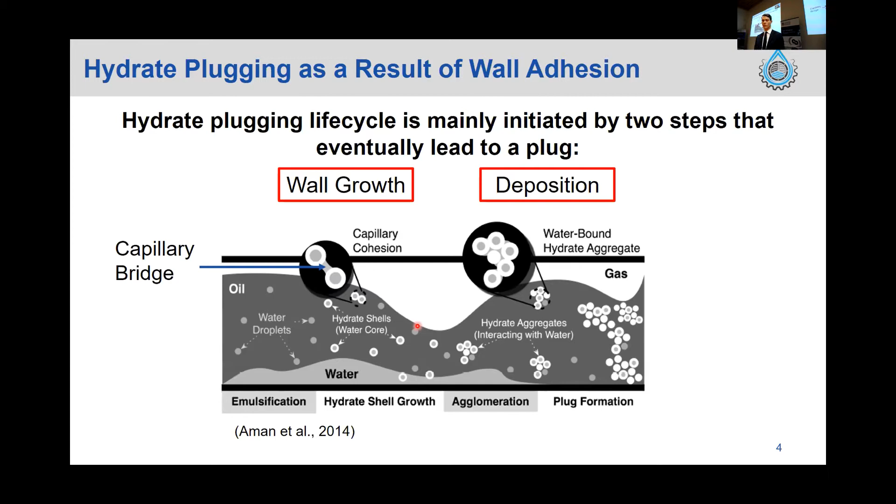The two particular components that this research focused on were wall growth particles—hydrate particles that have actually nucleated on the wall, which I mentioned before—and also hydrate particle deposition, which is more so talking about the traditional case looked at for hydrate particles that nucleate in the fluid and then make their way to the wall and form that deposit based on capillary bridge adhesion.

The actual material I've looked at, which Bruce mentioned briefly, is a thermoplastic composite developed by Airborne Oil and Gas. The one I'm looking at particularly is PVDF material, which is basically produced by melt fusing layers of this plastic together to form that structural integrity.

Some of the properties that have been tested are a temperature tolerance of 121 degrees Celsius and a pressure tolerance of up to 15,000 PSI. One of the really inherent benefits of this material is that it's inherently corrosion resistant and highly resistant to harmful chemicals.

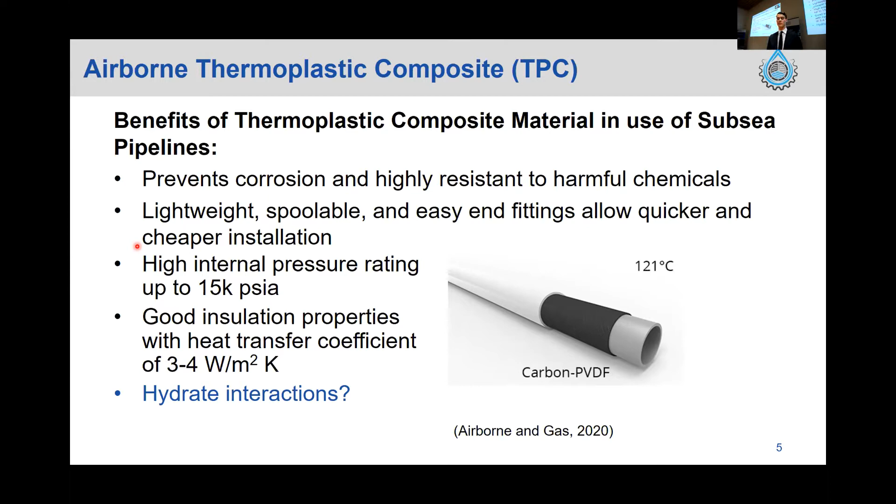That was the initial attraction for this plastic material. It's lightweight, spoolable up to long lengths, and has end fittings, which allow for a reduction in capital expenditure when installing. It's a great insulator, and all of these properties have been tested by Airborne Oil and Gas and are well known. So the focus of this research was to look at the hydrate interactions of the material and a potential further benefit for it.

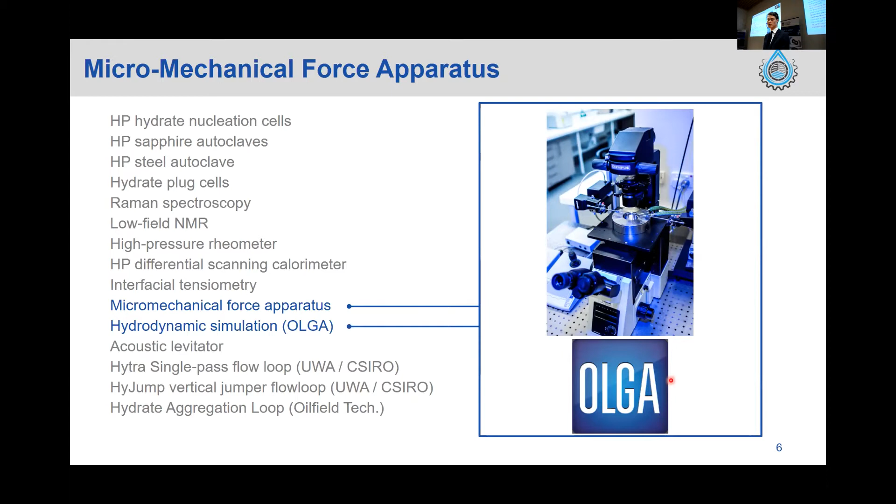On either side we have a cantilever held by a micro manipulator. The cantilever on the left holds the hydrate particle that's formed, and the cantilever on the right holds the substrate, in this case the thermoplastic composite substrate. A bit of the research at the end used the OLGA simulation to validate a potential technique.

Just to talk quickly about the MMF procedure - firstly a hydrate particle was formed with four steps. The water droplet was sprayed onto the end of one cantilever, about 300 to 400 micron diameter. That particle was transferred to liquid nitrogen, where it was allowed to freeze. Once frozen, it was quickly transferred to the cyclopentane bath, pre-cooled below the ice point. Once in the bath, the cyclopentane was raised to above 0 degrees, into that hydrate formation region of up to 7.7 degrees for cyclopentane.

This is a quick video of one of the pull-off trials. This is a little different from mine since these are two hydrate particles, but it gives the basic idea. There would have been a predetermined contact time, and now this is the actual pull-off itself - the top particle, or in my case the substrate, is pulled off until the particle dislodges from it.

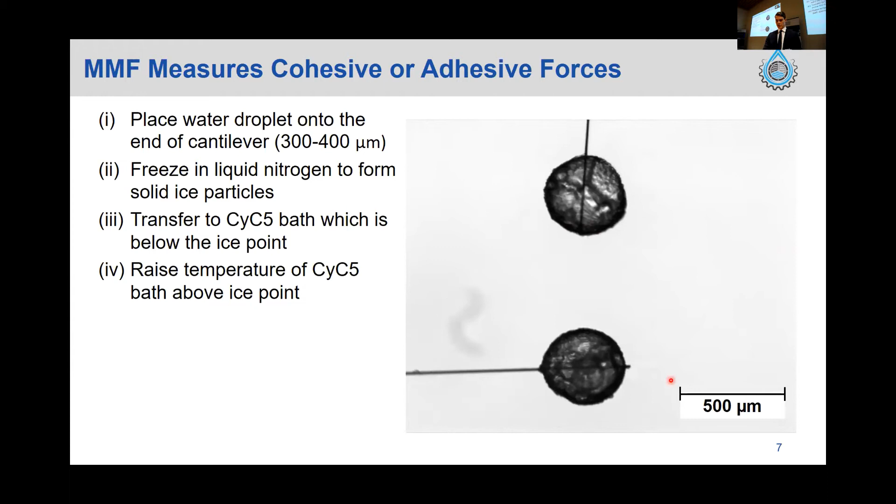Once that happens, the displacement of the hydrate particle from the substrate, in my case, is measured, and that, along with a known spring constant of the carbon fiber, is able to calculate the adhesion force using Hooke's law.

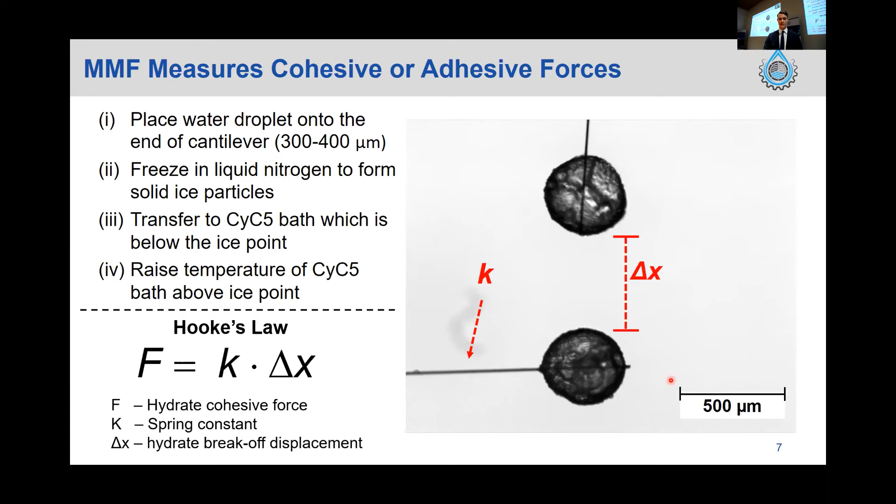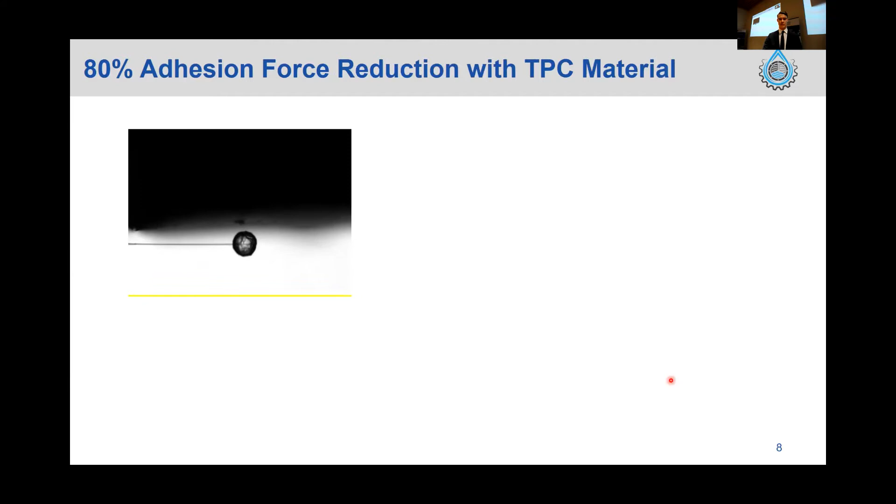Here is a video of a pull-off for my baseline TPC measurements, just to give you an idea of what that might look like. So, not a lot of adhesion there.

This is basically where the research started, with finding the baseline for the TPC material, so we could compare it to other materials that have been previously well tested, namely carbon steel.

Just to walk you through this figure - on the vertical axis we have the adhesion force, in millinewtons per meter, with each of the trials labeled. For each trial a new hydrate particle was nucleated, and each data point shows the blue mean, with a 95% confidence interval also shown.

Along with that is the mean baseline for carbon steel. What you can take from this figure, which is quite visually obvious, is that the TPC adhesion for each of these trials was well below that for the carbon steel. In fact, the mean TPC adhesion was an 80% reduction, as mentioned previously.

For comparison, Lehane's TPC baseline on a non-water saturated system is plotted here, which agrees closely with my results. That reduction in adhesion force for the TPC compared to carbon steel was explained by a relatively hydrophobic surface.

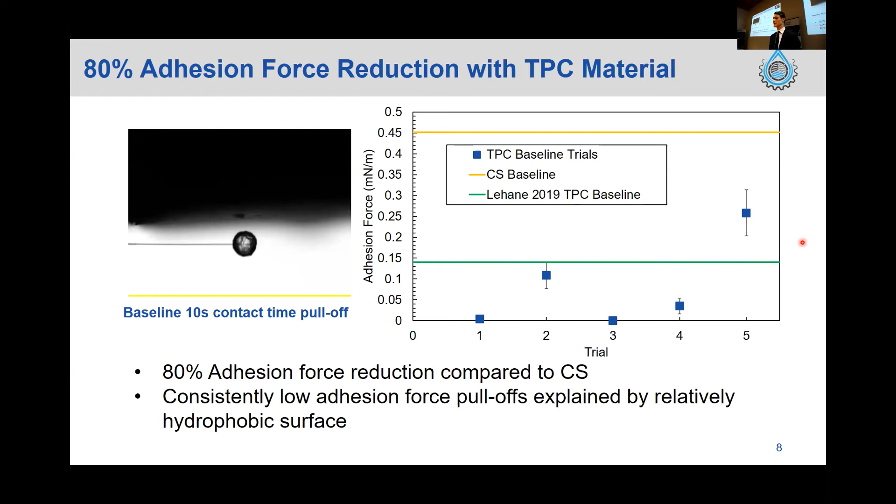After this baseline, the next direction of the research was to investigate how this adhesion might vary if the contact time was increased. For these baseline measurements, there was only a 10-second contact time, comparable to other studies done on other materials.

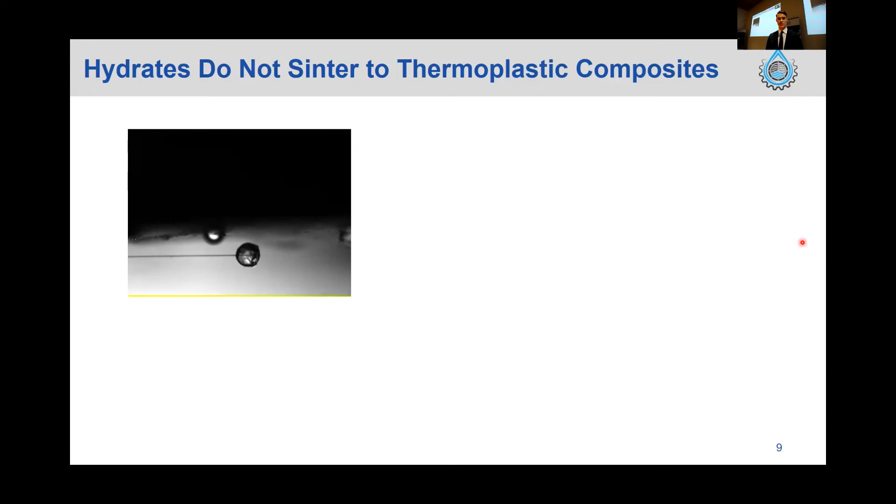And as you can see, not a lot of difference there at all between that and the previous slide, not a lot of adhesion force.

This figure shows the adhesion force on the vertical axis and the contact time on the horizontal axis. The three contact times measured and investigated in this research were 10, 30, and 60 minutes.

There is no general trend to this data, which previously for other materials, namely carbon steel, was definitely found within that time. What to take from this is that a sintering mechanism doesn't begin to dominate over these longer contact times, where with carbon steel there was a chemical interaction that would begin to dominate that adhesion and really increase the adhesion force between the particle and the substrate. That was observed up to 1 hour.

So again, both the baseline and the time-dependent pull-offs were shown to have a relatively low adhesion force. The next progression was to look at what might potentially happen if the hydrate particles nucleated on the wall as opposed to in the bulk fluid.

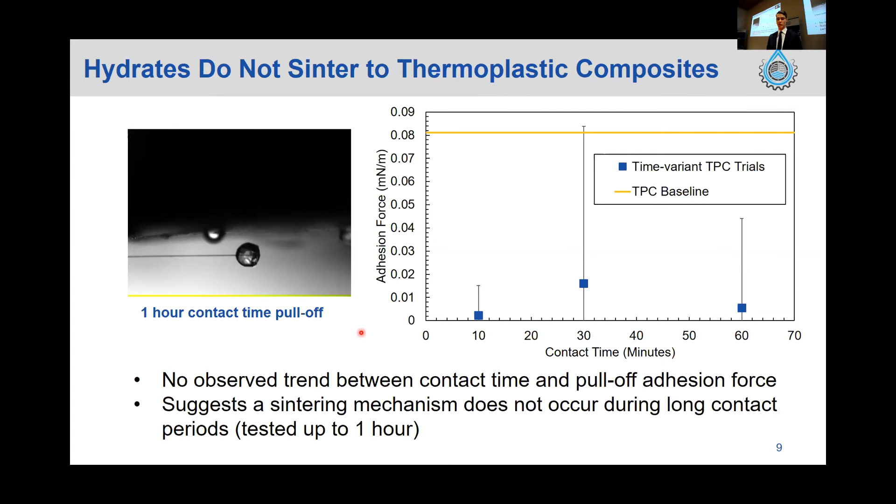Here is a figure showing, from left to right, the 10-minute intervals of a 60-minute annealing period for one of these hydrate particles nucleating on the wall. The procedure was that when the hydrate particle began to nucleate, it was brought into contact with the wall so that nucleation mechanism could interact with the wall.

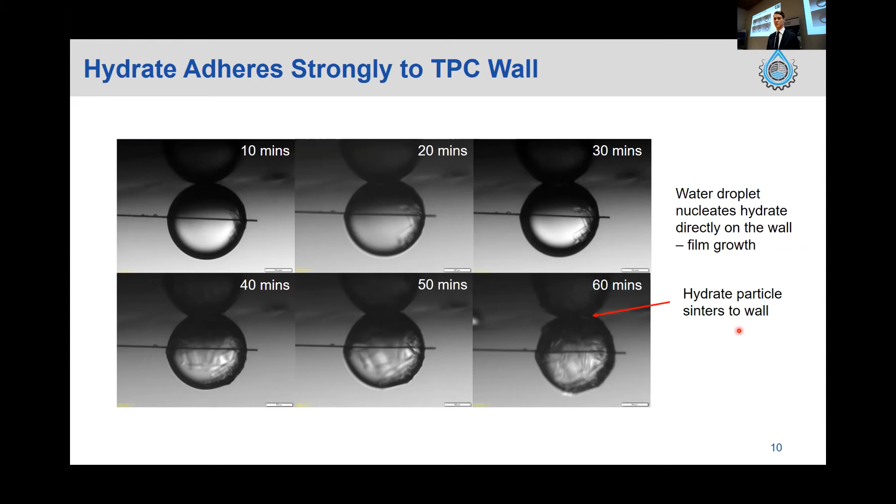Between each picture you can see the interface expanding, and you can actually see this film growth begin to happen. You'll see in the next slide that that film growth really causes the adhesion to increase largely compared to those hydrate particles that were just formed in the bulk fluid. I'll show you that now.

You can see visually how that was a much larger displacement than the previous two, and you could see a bit of the hydrate film coming off, which was contributing to that adhesion force, requiring a much larger pull-off.

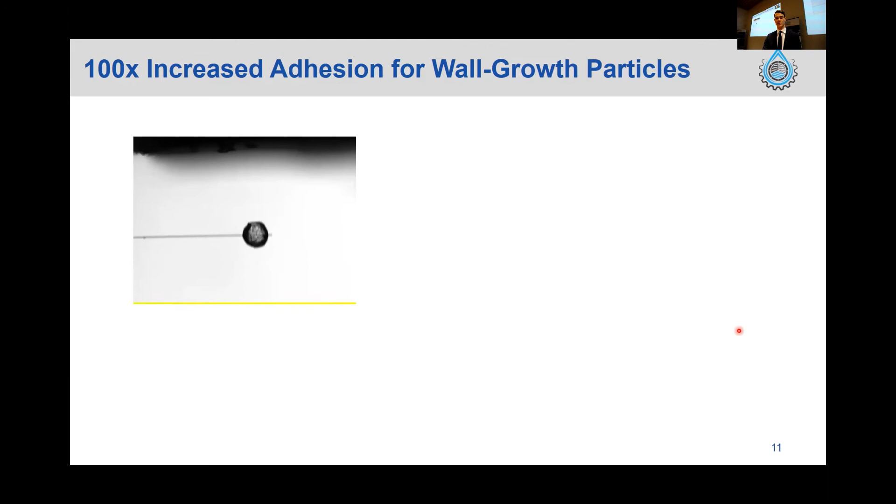Here are plotted the three individual trials that were done. For these, there weren't repeat pull-offs performed because, as you could imagine, once that hydrate particle had been pulled off, that structure was changed and couldn't be reattached by putting it back into contact. For each of these, you can see it's generally within the region of 6.5 to 8 millinewtons per meter, which is actually a 100-fold increase from the baseline and roughly the time-variant trials.

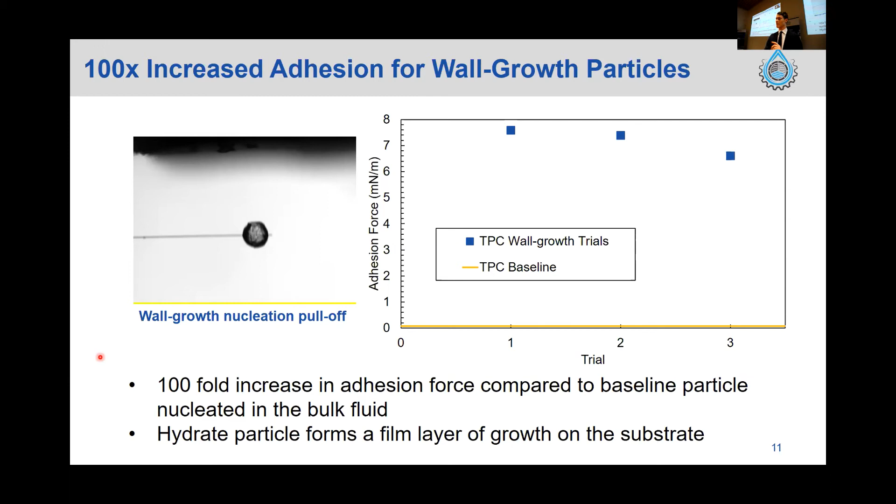That obviously poses a much larger risk in the context of plugging, and that, as I mentioned, was basically a result of that film layer really increasing the adhesion through a chemical interaction. So the next step was to introduce anti-agglomerants and potentially look at how they might affect that adhesion force.

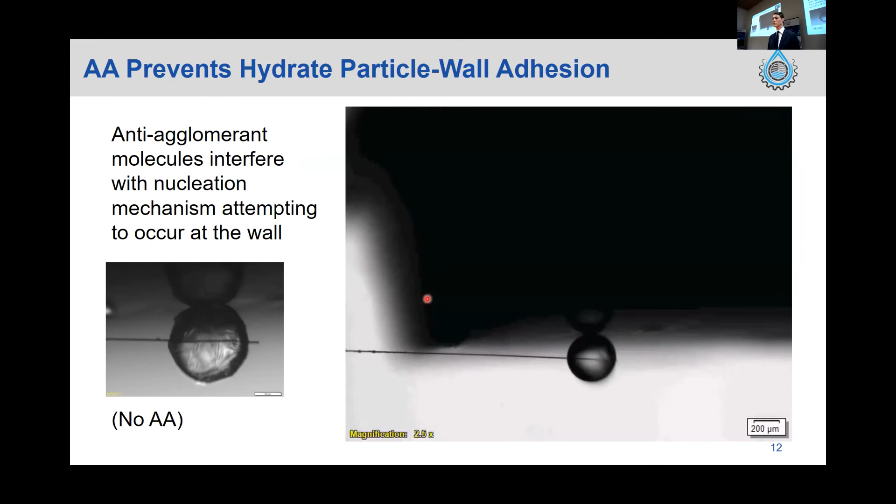For comparison, here is the last picture of that 1-hour annealing period, so you can see the film that had formed. And here is a video of a 1-hour time lapse for a hydrate particle forming with 0.05 weight% anti-agglomerant in the system. I'll show you how that played out now.

As you can see, very different - that interface is extremely small. The anti-agglomerants really interfered with that hydrate nucleation mechanism to the wall, and you can actually see it was forced to grow outward like that.

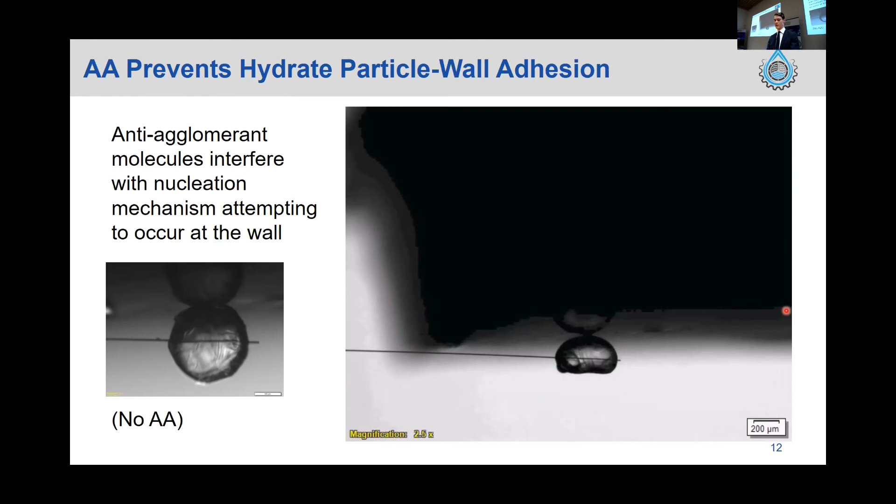It's quite interesting, you'll see the pull-off of that same particle in the next slide. I'll show you that, and you can just see how much effect the anti-agglomerant really had on that.

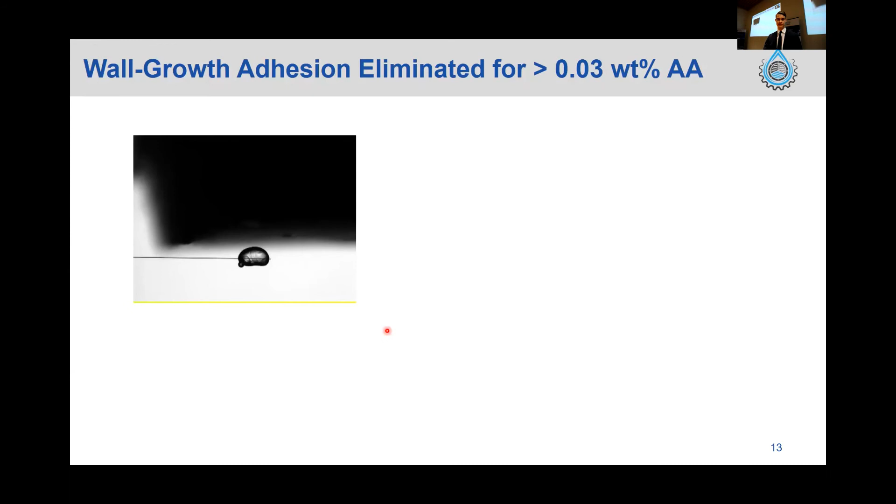So what you could see there wasn't even an adhesion force at all. It was a complete reduction to what could be measured on this apparatus. So that was really promising.

So basically with those anti-agglomerants, there was a variety of weight percentages tested. The findings were trying to find a maximum weight percent where an adhesion force could actually be measured. That was all the way down at 0.03 weight percent anti-agglomerant in the system, which produced an adhesion force of 0.13 millinewtons per meter, quite comparable to what was seen for the baseline and the time variant, relatively low compared to the wall growth with no AA present. The summary is that quite confidently there's a complete reduction in that adhesion force below 0.1 weight percent anti-agglomerant.

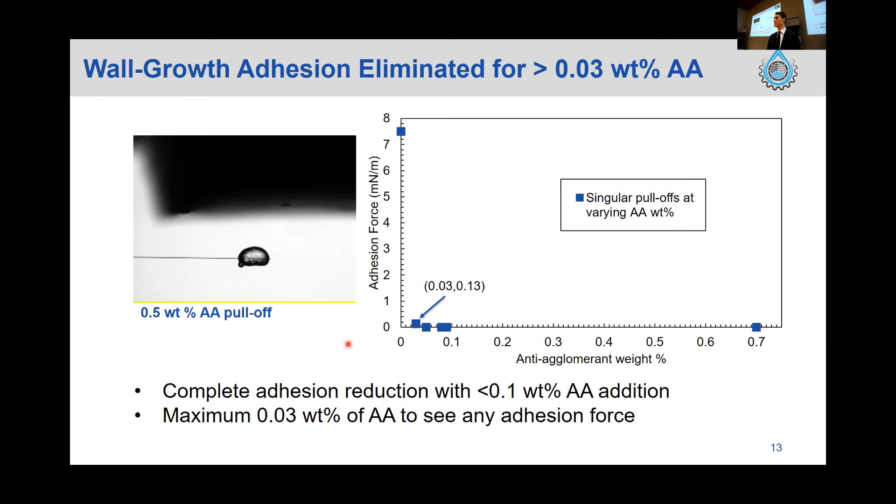The last part of this research was to potentially take it down a different route from the anti-agglomerants and see in Olga if we could extract some of the shear stresses from a simulation, and see how those shear stresses might be able to contribute to overcoming the adhesion force of some of those wall-grown particles. A nominal case was used in Olga of a 50-kilometer flow line with a 2-inch pipe diameter and a 100-bar pressure differential, which was basically just a water dominant system.

So what was taken from Olga was the wall flowing shear stresses, and that was used to calculate the lift force that might be experienced by a hydrate particle adhered to the wall. That was balanced against the adhesion force that was measured, using the 8 millinewton per meter value to be conservative, the highest value recorded.

This basically shows that the shear stress required is dependent on that hydrate particle diameter. The findings for this nominal case were that hydrate particles with a diameter greater than 55 micron were able to actually be removed with the wall flowing shear stresses in that case, without any AAs present. It should also be noted that there was no consideration of moments or the rolling of those particles along the wall, which would also contribute to that removal.

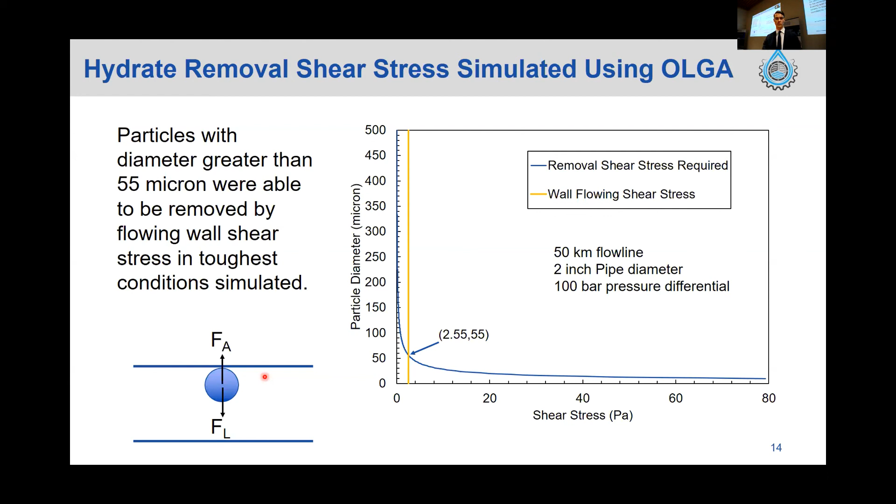So just to recap on those conclusions based on everything we've seen in the presentation: there was a significant lower affinity of the TPC for hydrates than carbon steel, which was really promising, shown as an 80% reduction. The hydrates were shown not to sinter to the TPC with that longer contact time. I forgot to mention, but the takeout from that is it's really encouraging for transient operations when we can have shutdowns in flow and see that hydrate potentially sitting in the pipeline for a longer period of time. That gives you a bit of confidence that they won't cause that problem to a higher degree than what might be seen in a different pipeline material.

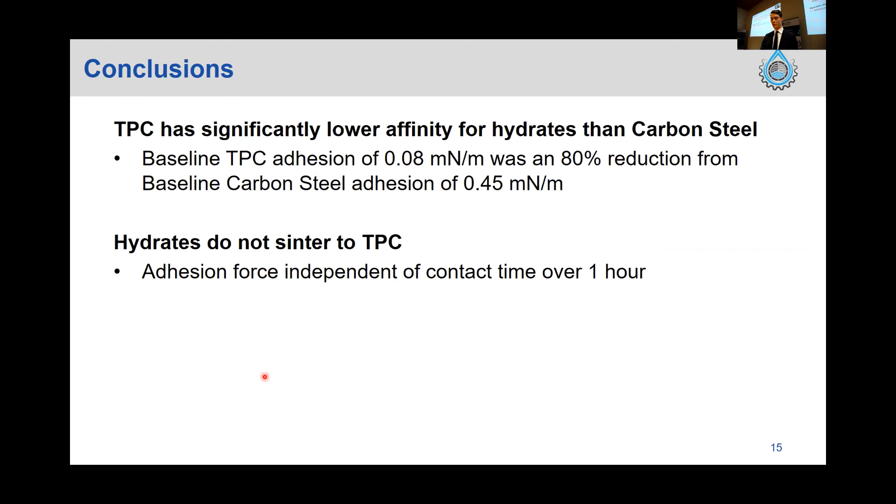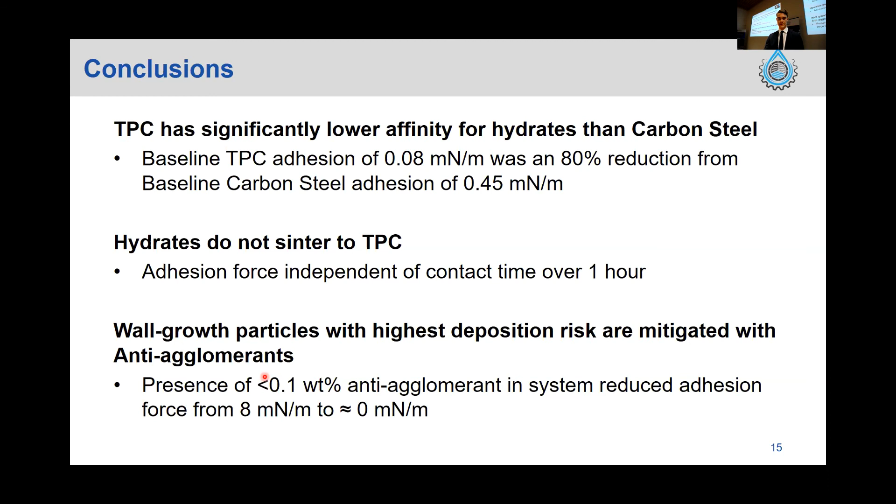And lastly, the wall growth particles, with that 100-fold increase in adhesion force, were shown as being the most problematic and highest risk, and those could be mitigated quite well with the presence of a low weight percent of anti-agglomerants. Some points for the way forward from this...

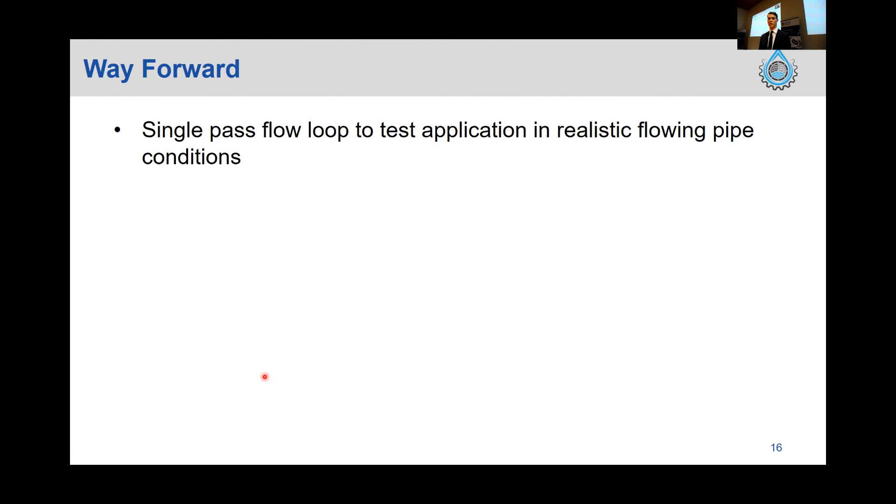I think it would be quite advantageous to test this material potentially at some point in a single pass flow loop, under more continuous and realistic conditions, to see how it holds up with hydrates.

I think that surface roughness might be good to investigate with its effect on adhesion force. Particularly with those wall growth particles, it was quite interesting how the shape of the surface of that material interacted with the particle, and how surface roughness might affect things if there was a more rough material.

Another thing was investigating the relationship between subcooling and adhesion force. Historically with a lot of these materials we've seen, and also with hydrate particle cohesion, a decrease in subcooling results in an increase in adhesion force, because that liquid layer around the particle melts a bit more and contributes to that adhesion. I just think this will contribute to the understanding and profile of that material more, if it were potentially to progress to industry.

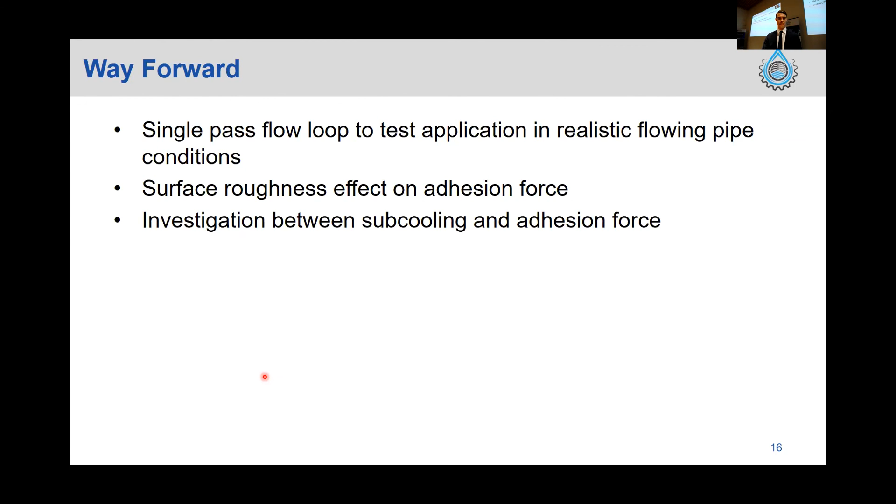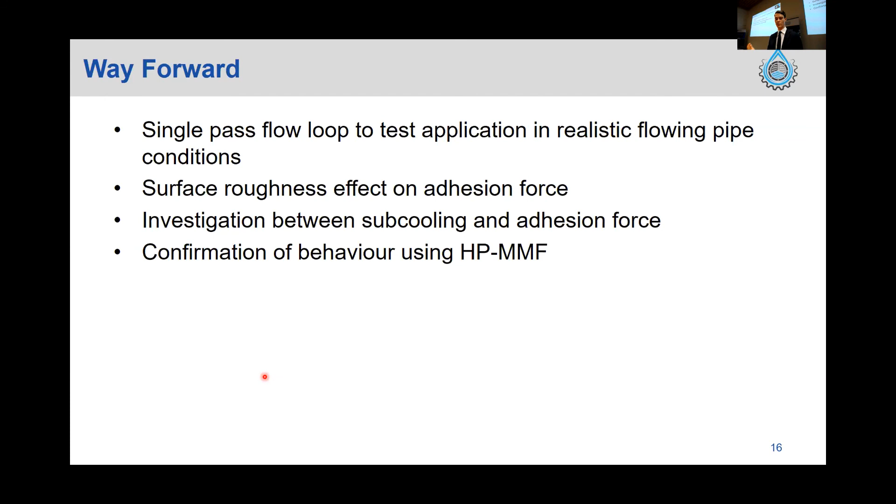I think a confirmation of this, potentially using the high pressure MMF, which is basically similar to my apparatus, operated under more realistic conditions with a composition closer to what you might find in a natural gas pipeline, also at high pressures, which you'll hear about a little bit from Colorado School of Mines people after this.